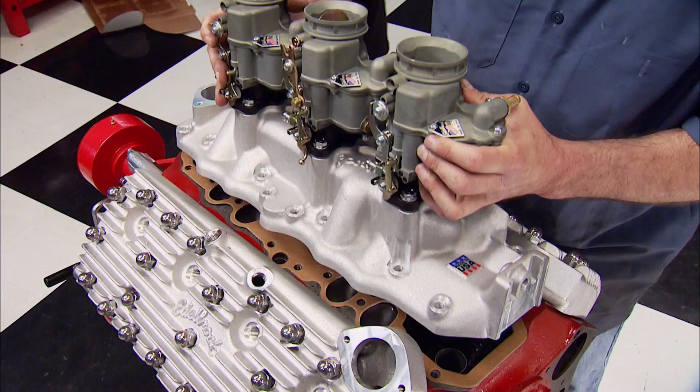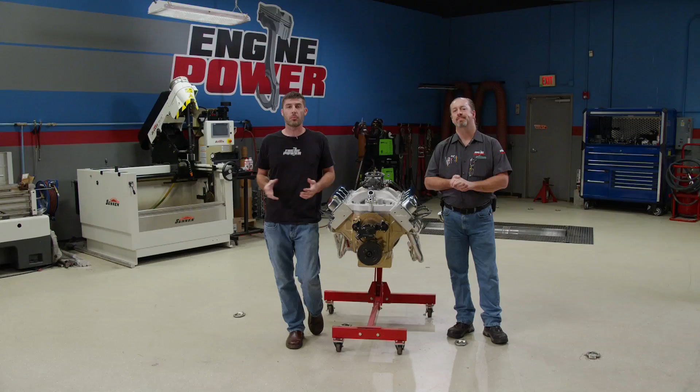Today, it's high performance history as we revisit some of our favorite iconic engine builds. Aside from building big performance power plants, we love to pay tribute to the engines that not only have personality, but plenty of history as well. And what better way than to revisit some of the vintage iron that we have had the pleasure to revive and give new life, and some more power.

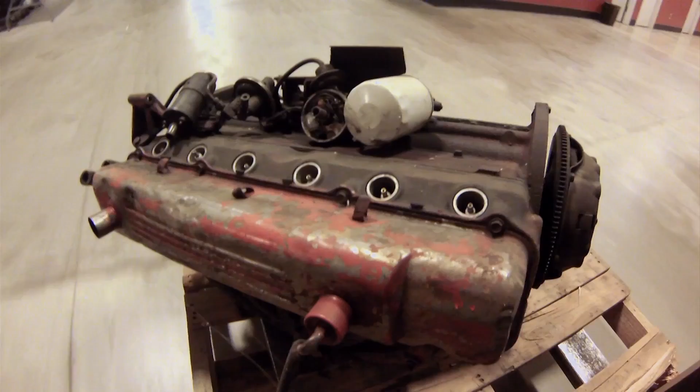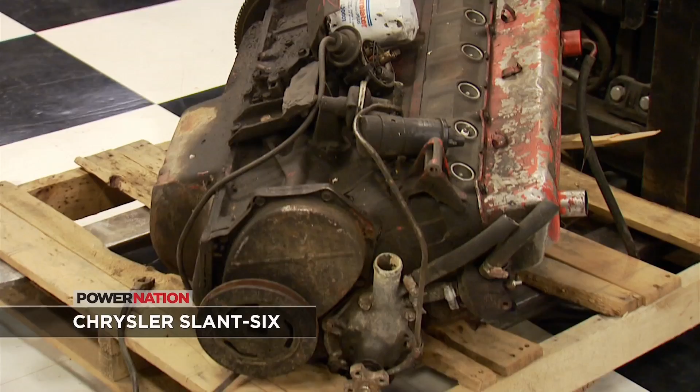Legendary for being indestructible, today we're going to dissect, rebuild, and hop up a true American cult engine, the bulletproof Chrysler Slant-Six. Why, you may ask? Well, it's a popular engine several of you viewers have been asking us to go through. Its revolutionary inline-six design is tilted 30 degrees off-center to allow a lower hood profile, a lower center of gravity, and more access to engine accessories.

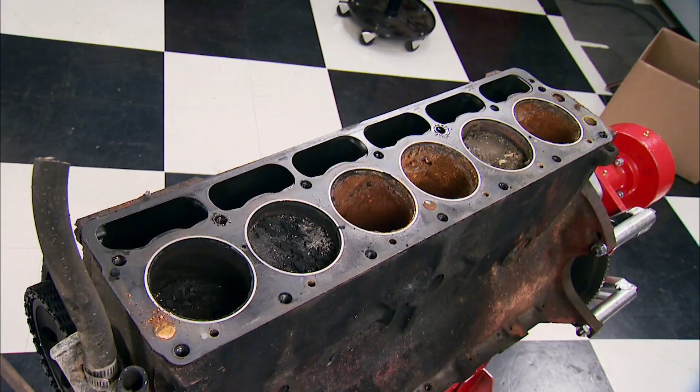We picked this one up at the local boneyard for $150, and while it's not going to perform like a V8, this leaning tower of power is high in the cool department. But I think it has some issues. Unfortunately, ours sat out in the elements and heavy corrosion kept us from reusing it.

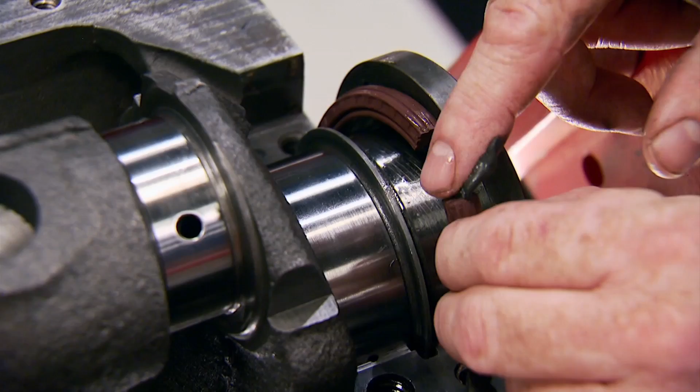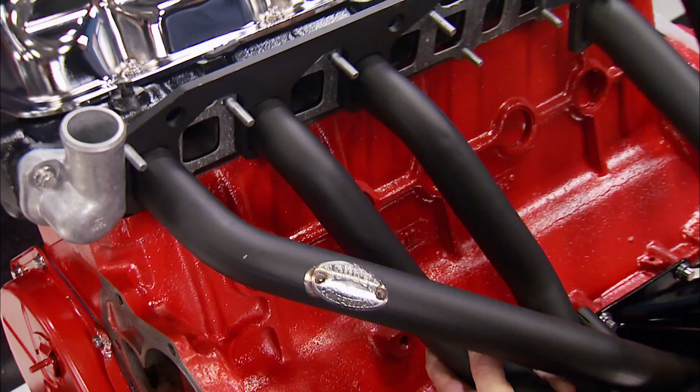So we started with a later model block and had it freshly machined. Now the crank was installed with an upgraded two-piece rear main seal, and reconditioned rods were dropped through the bores with new pistons attached. A completely refreshed cylinder head was dropped on the deck, and the engine was finished off with performance parts from Hooker, Offenhauser, and Edelbrock.

We couldn't dyno our Slant-Six because the bell housing diameter is too small and it wouldn't dock up to the dyno, but we told you we had a home for it, and it doesn't get any better than this 71 Duster. When it's cold, it spits, it sputters, I gotta warm it up, it's got an exhaust leak, so it just makes a lot of racket.

And here's its owner, Ken Symington, who has an emotional attachment to this work in progress. You know, this car is over 40 years old. There's not that many of them out there running, mainly since my wife bought it brand new. When I first met her, she was blonde, she was cute. Then the next time I saw her, she showed up in this red car, and the red car and the blonde hair went together, and I knew right then I was in trouble. She loved it. It was her first car. She might love it more than she does me. I've never asked that question to her.

This is actually more fun than dynoing a big power car. I feel safer, but not really. Just for fun, let's see what this one has left in it. All right, here we go. We'll make the pull from 2,000 to 3,800 and hope we can make it there.

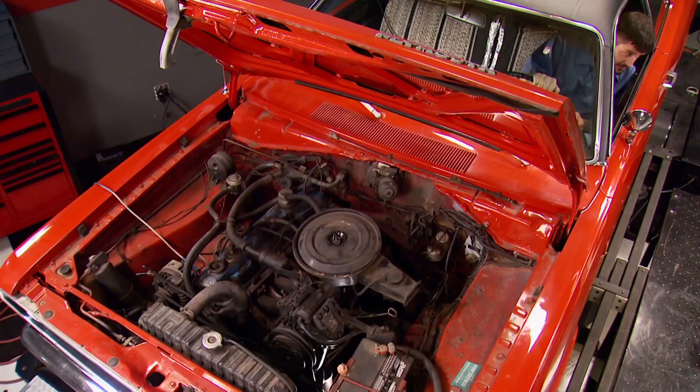This isn't the original 225 engine. It was replaced with a 95 horsepower 1975 model in the 80s, and it's seen a lot of miles since, making this Duster a perfect home for our leaning tower of power.

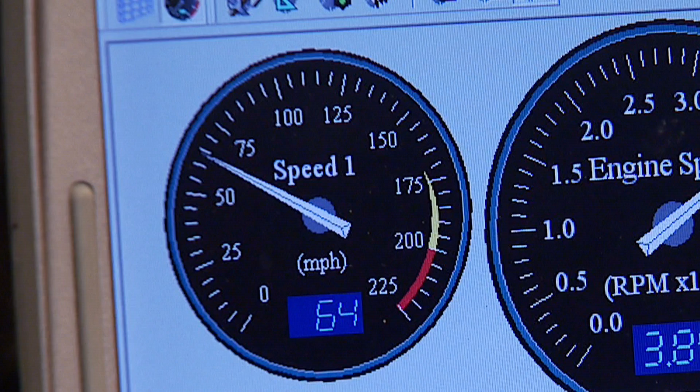I think we're there. At a whopping 64 miles per hour, it made just over 70 horsepower. And the graph tells the story. We're not laughing at it, because this was a staple of economical performance back in the day.

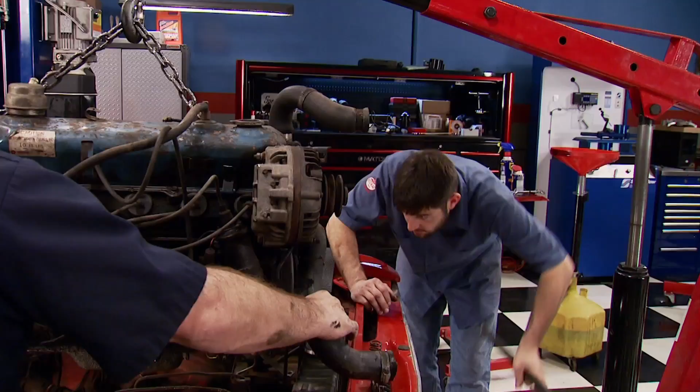You're good on the back. We can hoist this 225 out of the car to make way for the new Bullet.

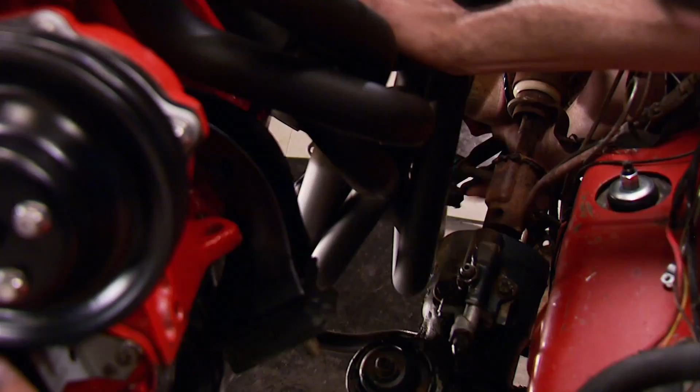It's time to drop it in. Hot dog. Nice, nice. I'm good right here. Coming down. Look, how's that other side? Oh, something happened. It's in. Yes, yes, yes.

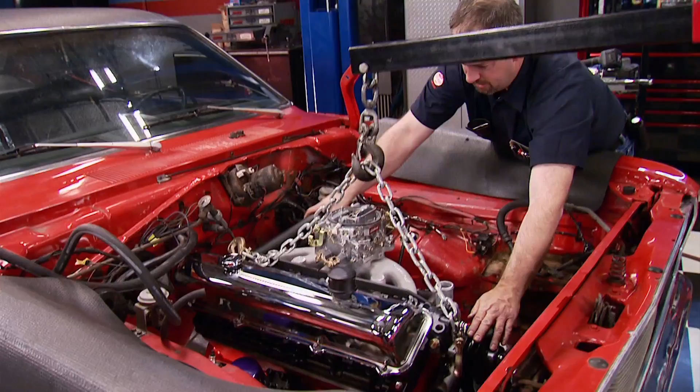At this point, this project is done, and just in time. That's super cool. I feel like a kid. I feel like a kid at Christmas.

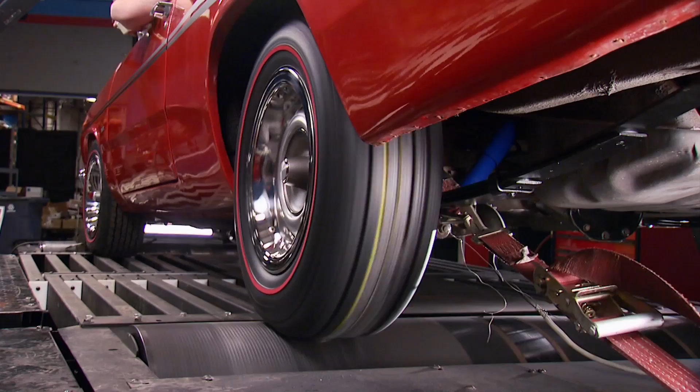We're taking this one to a safe 4,500 RPM. Look at that, 125 horsepower. Get out of here. 161 foot-pounds of torque.

Wow. We're not done. Oh, we're not? No, we're gonna pull a little more out of it. Oh, really? Yeah. Wow. Let's make a timing change, 2 more degrees of initial timing for a total of 6.

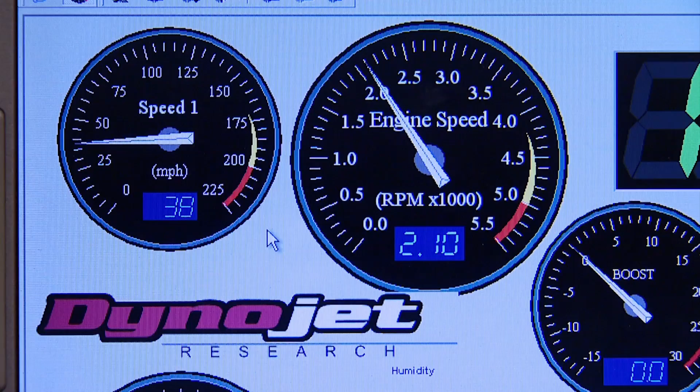129 and 164. Picked up 3 foot-pounds and 4 horsepower. That's impressive.

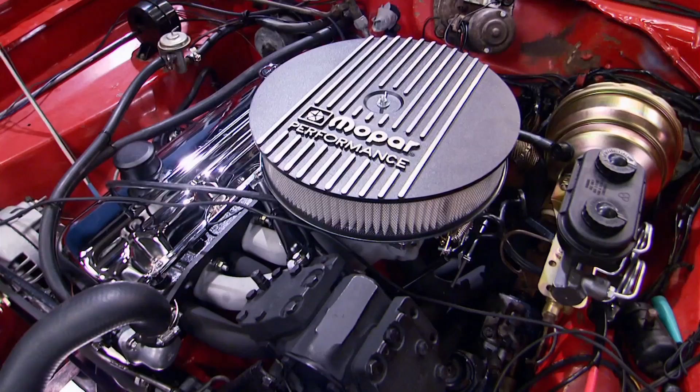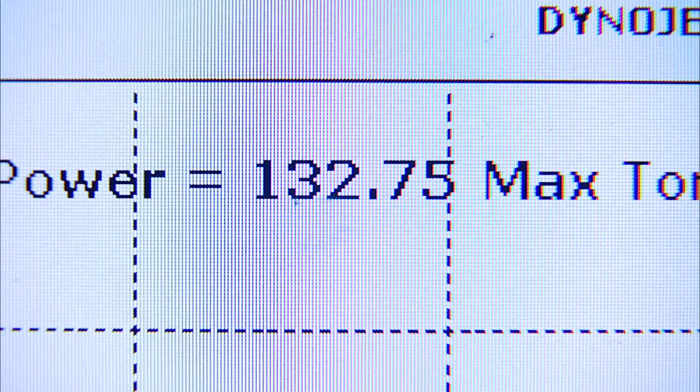One last run with 2 more initial degrees for a total of 8. How you like that? 132, 170. That is marvelous. 2 degrees picked it up 3 horsepower and 6 foot-pounds.

And you just can't get used to hearing that roar. I see it rolling down the road, just zipping. And now he can, with almost twice the power he started with. Hats off to Ken for keeping the legend of the Slant-Six alive.

Now, let's hop in the way back machine for an engine that started it all, the Ford Flathead.

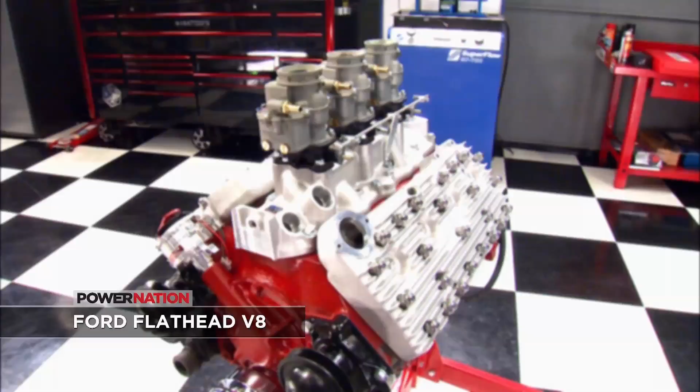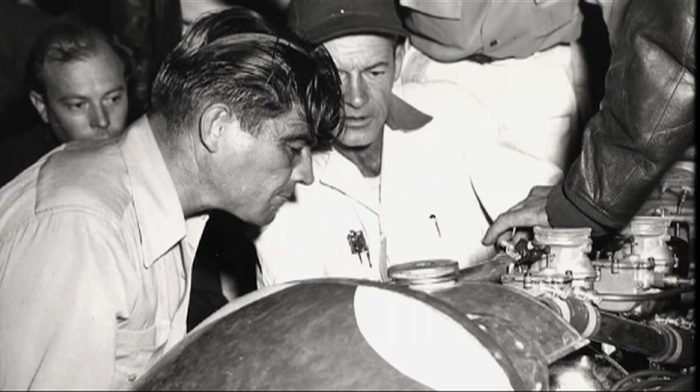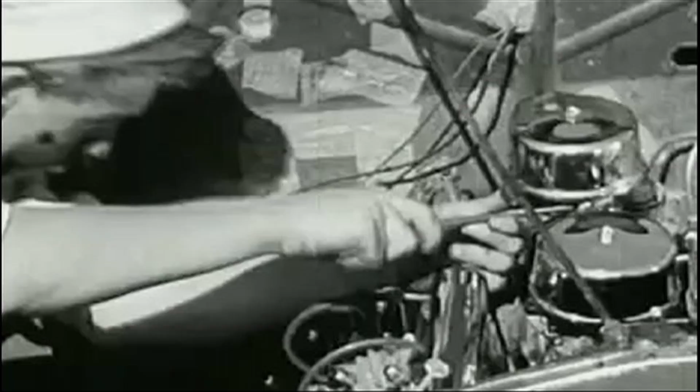A while back, we took a closer look at the engine that launched an entire lifestyle and industry based on power and speed, the Ford Flathead. A simplistic V8 with room for improvement, and it didn't take long to find it. It was then when Edelbrock marketed his first high-performance intake manifold, with a cylinder head soon to follow. And he wasn't alone. Go-fast parts were popping up everywhere. A new purpose for the Flatty was well on its way.

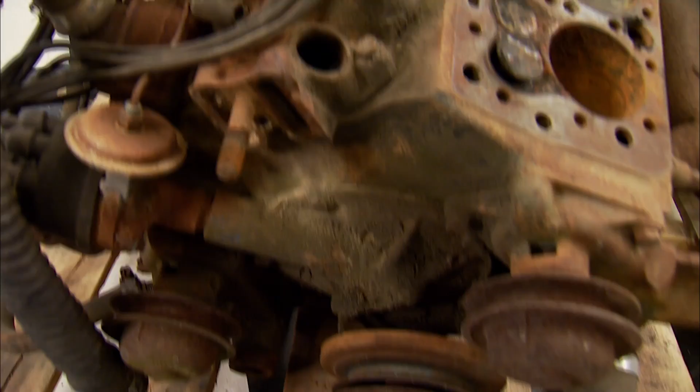We found ours in a junkyard intact. The casting tells it's from the mid-50s, and the rust confirms it. This thing is locked up solid. A short soak freed up some pistons, but the rest put up a battle. The block had been previously bored and appeared solid, but only a trip to a machine shop can confirm it.

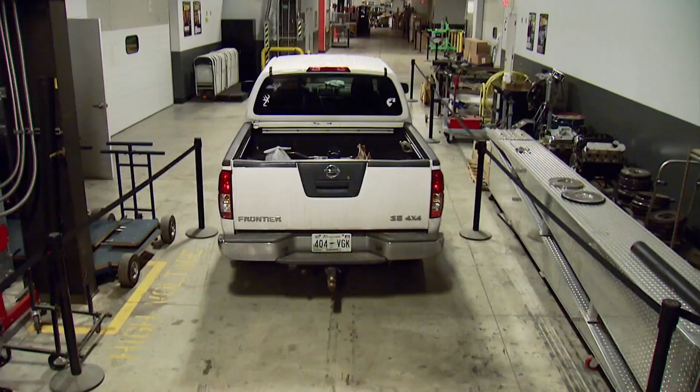Up next, back from the machine shop, we're building power.

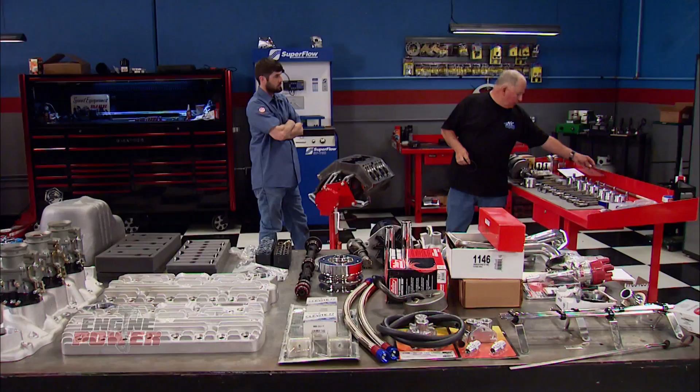We're back, and so is the Flathead, along with legendary engine builder Keith Dorton. He also brought his passion.

You know, they're the coolest sounding engines you've ever heard. They have a unique sound, and they run so smooth, and in stock form, they were just as quiet as a Cadillac engine, you know.

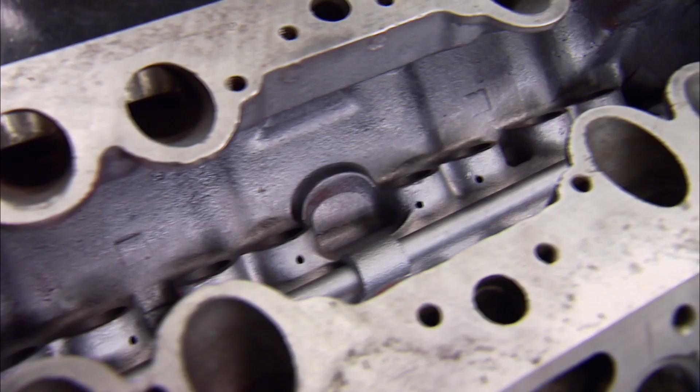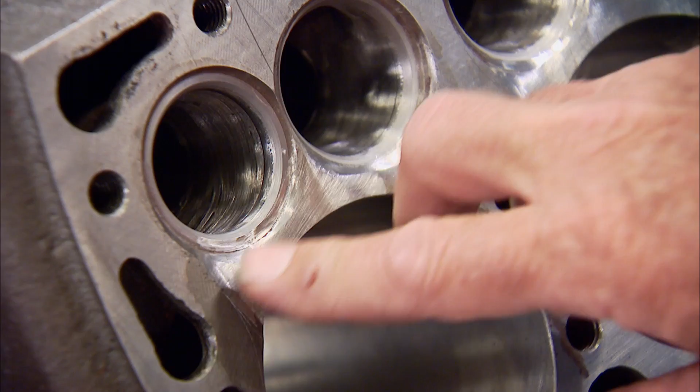So it was good to find a block that was in as good a condition as this one is, even though it had some cracks in it that are common with the Flatheads, but this one, about as good as you're gonna find now. All that we had to do at the shop, and it wasn't a must, was we did the relieving of the block, which is the area between the valves and the cylinder. We dropped it about 80 to 90 thousandths to increase the airflow from the valves to the cylinder, which is part of the combustion chamber.

The first part of the build will be the bottom end. Now a set of Clevite bearings will fill the Flathead's 3 main journals. The crankshaft is Scat's 9000 series, made for the street and strip. It will give our Flathead 304 cubic inches.

Next up are the original main caps, now filled with the other halves of the Clevite bearings. ARP bolts will anchor them in. With ARP's ultra torque on the bolts, we can torque the first 2 caps to 40 foot-pounds.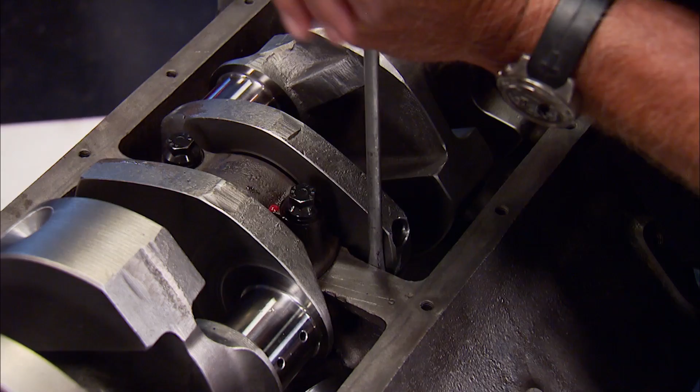Forcing the crank towards the front of the engine will align the 2 halves of the thrust bearing, which is at the rear. Now torque that cap to 40 foot-pounds. Set up the magnetic base and dial gauge on the crank snout, and with the reading at 0, we'll rock the crank from front to back to check the thrust clearance. Right at 6, which is in spec.

Now torque all the caps to the final value of 70 foot-pounds. The Scat rod is held to the Ross forged piston with a floating pin. Spiral locks will keep it in place.

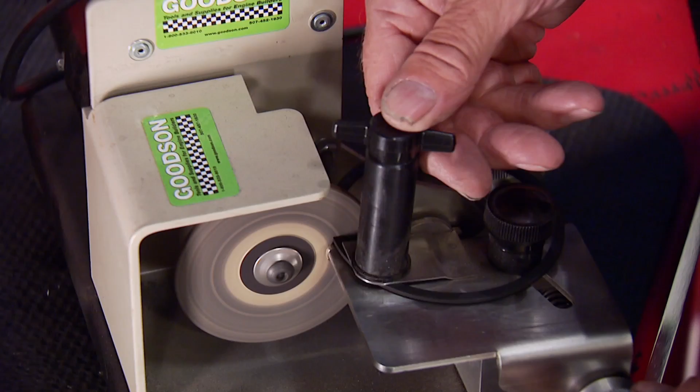Gapping the rings is a must. Keith is using our Goodson filer to open the gaps, which will prevent them from touching when the engine gets up to temperature, which would lead to a major failure.

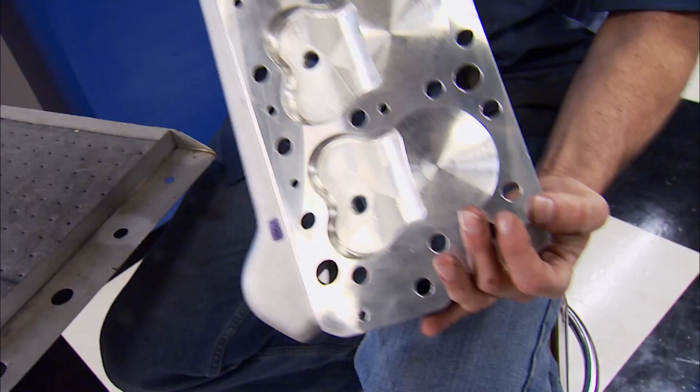Vic Edelbrock Sr. designed the first aluminum performance flathead cylinder head back in 1938, and from that point on, production never ended. This is the 49 through 53 version, and it got its name from the thin design. Underneath, the combustion chamber looks small, but it's actually 65 cc's. They're ribbed internally and externally for strength and have large water jackets for better cooling. Both heads will be torqued in sequence to 60 foot-pounds.

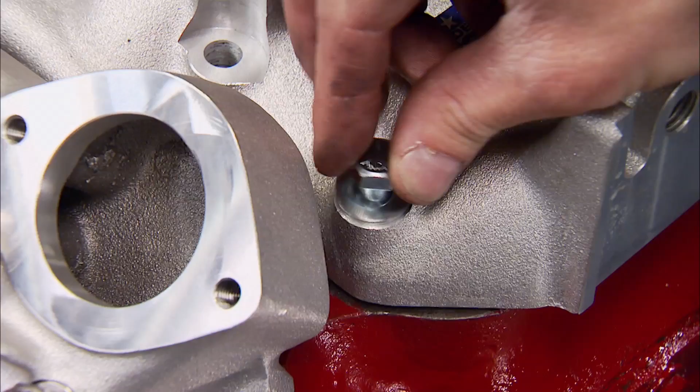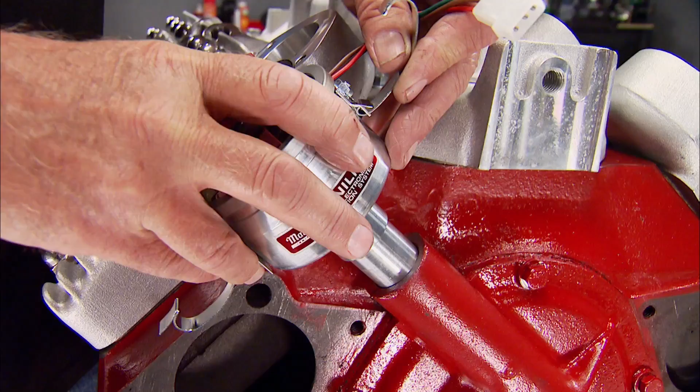For spark, a Mallory Unilite electronic distributor, a huge leap in technology from the 50s. New high-flow water pumps are next, and these will be the last parts Keith installs for us.

We got to put some fuel lines on it, or you do, because I got to get back to work. We've been gone long enough.

Keith did what he came to do, reviving an important piece of history. Really a fun project to come back and work on something this old. And I'm very confident that we're going to get some good results out of it. And if Keith says so, so it shall be. Now, as far as a horsepower goal, we're going to let the dyno decide, because we just don't know.

Got your seatbelt on and your helmet strap? I'm ready. Good. Let her rip, Tater Chip.

156, 247. Awesome. I like it.

Let's throw some timing at it and see how it likes it. We'll sneak it up to about 26.

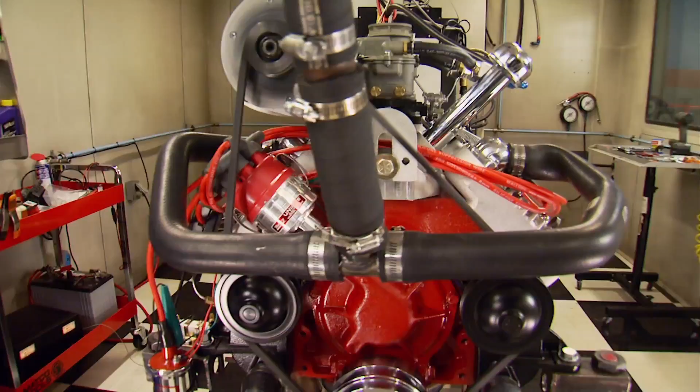So it's back to 26 degrees for one last pull. We'll claim victory at 159 horsepower and 257 foot-pounds of torque.

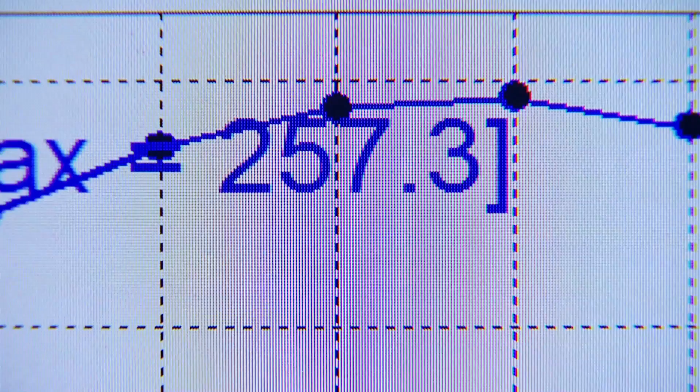I'm glad I got to be able to help with it. This is ultra cool. It's a great little engine. It looks great. We've built plenty of engines, but the Ford Flathead was a boneyard to beast favorite.

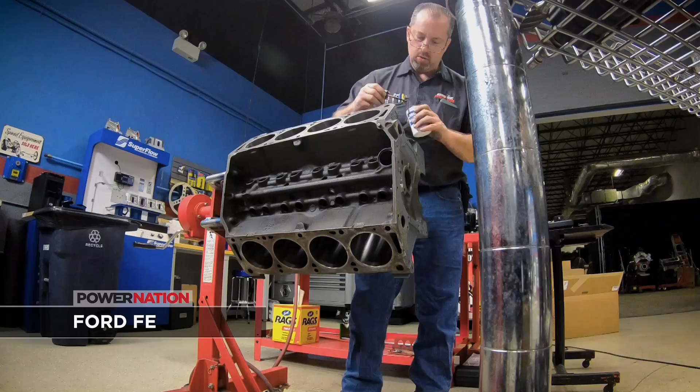We're back on engine power with a new and, more importantly, damage-free block for the 390 FE build. Before we got started, we examined this block inside and out, and it looks good.

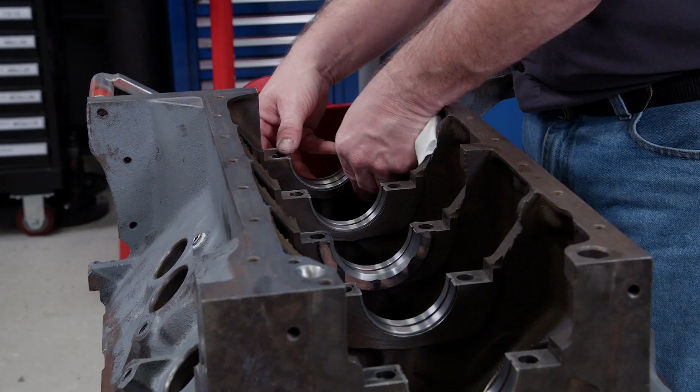Now we can make forward progress on the build, starting with new cam bearings. Next are a set of Speed Pro main bearings, with the clearance set up between 30 and 33 ten-thousandths. With a fresh rear main seal in place, the bearings are lubed with Permatex Ultra Slick. Then the crankshaft is carefully placed into the block. This is a cast steel piece from Eagle Specialty Products with a 4.250 stroke. The ARP fasteners are torqued to 100 pound-feet.

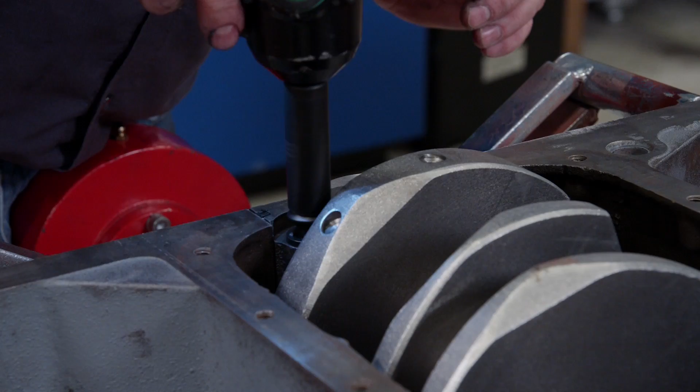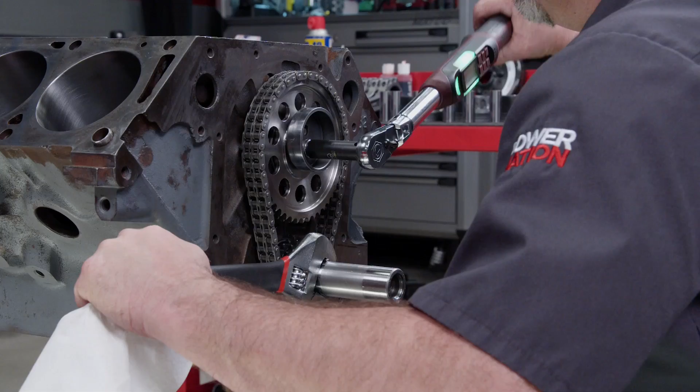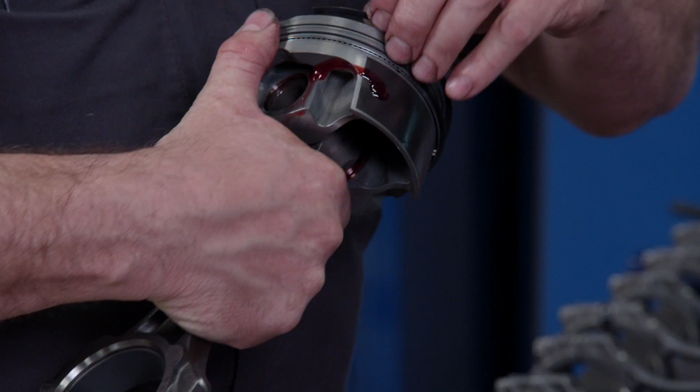The camshaft is a custom ground billet hydraulic roller from Comp Cams. The lobes are from their Extreme Marine High Lift series, which increases durability with extended run times. Comp also provided the billet double row timing set. The pistons are Mahle PowerPak series with a 16cc dish. They are mated to a set of Eagle 4340 forged I-beam connecting rods that are 6.700 in length. The included ring package is a modern 1mm, 1mm, 2mm thick set.

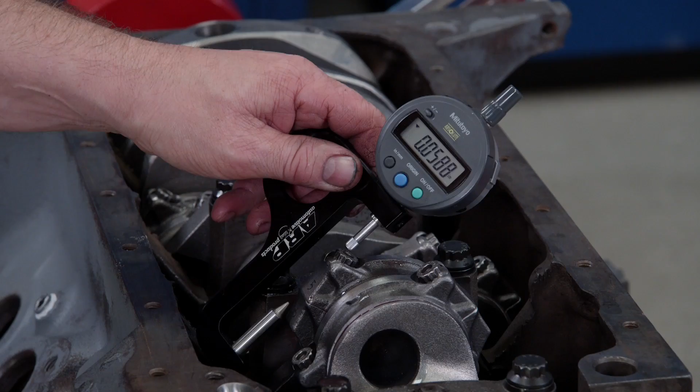The rod journal is the same size as a big block Chevy, and the rod bearing clearance is between 23 and 27 ten-thousandths. The rod bolts are torqued to 90 pound-feet to achieve the correct bolt stretch of 59 to 63 ten-thousandths. We confirm this with our ARP digital rod bolt stretch gauge.

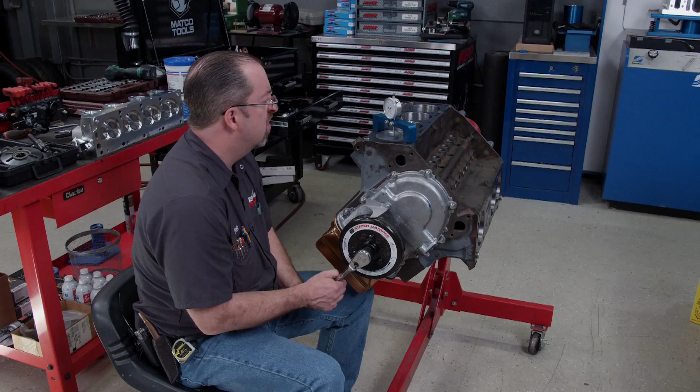A Melling high-volume oil pump will keep the engine well lubricated. We chose Milodon for the windage tray, oil pickup, and 8-quart oil pan. With the ATI balancer in place, true TDC is set, and the timing pointer is modified to indicate 0.

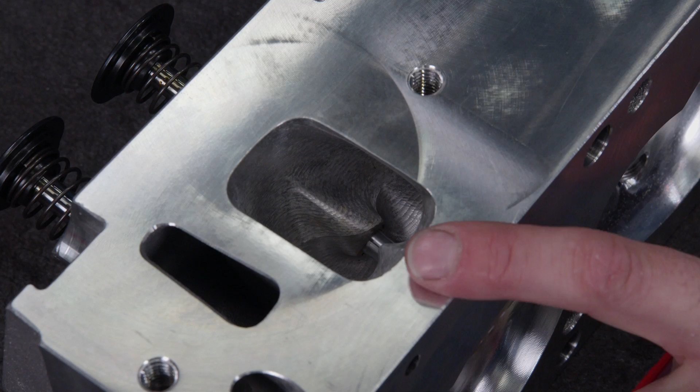It's time for this old iron to meet modern airflow and performance thanks to the guys at TrickFlow for designing and bringing to market these FE cylinder heads. They're designed for 390 through 428 engines and are dubbed the PowerPort 175s, named for the 175cc intake runner. The combustion chamber is heart-shaped and measures 70 cc's. The intake valve is 2.190 and the exhaust valve is 1.625 diameter. Flow at .600-inch lift is 332 CFM, and these heads are a direct bolt-on for all '61 through '76 FE engines.

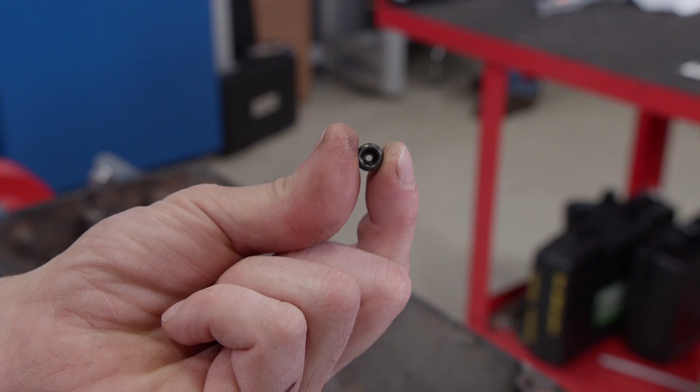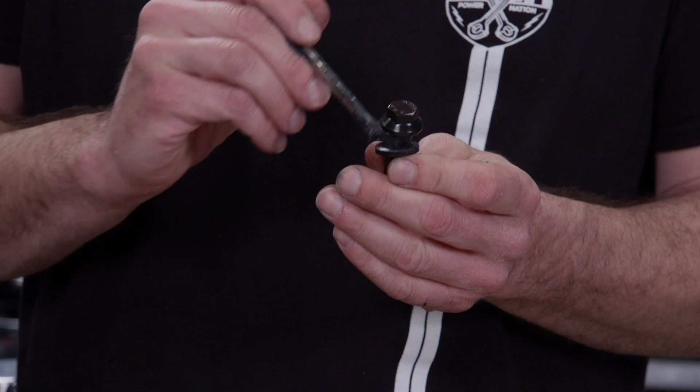We're restricting the oil to the top end of the engine using a 3/8 set screw with a 75 thousandths hole drilled into it. This ensures more oil goes to the main and rod bearings instead of flooding the valve train. 30 thousandths thick Cometic MLS gaskets drop into place, followed by the cylinder heads, which are torqued to 100 pound-feet.

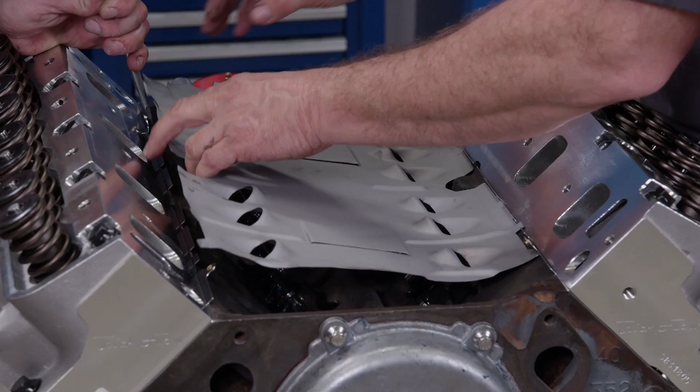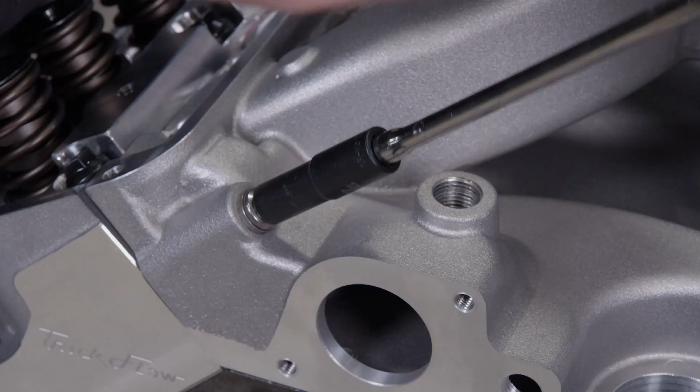Comp retrofit hydraulic roller lifters will move the valve train. Our freshly sandblasted intake splash guard goes in, followed by some beads of Permatex Right Stuff 90-minute gasket maker. The TrickFlow Track Heat intake manifold is a single plane design with a basic operating range from 4,000 to 7,000 RPM, perfect for our application.

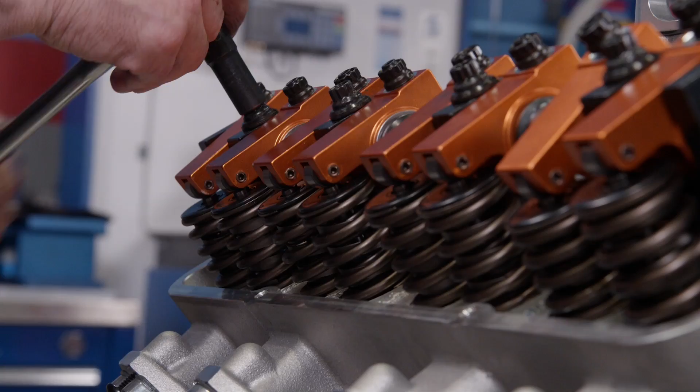Our engine combination requires custom length push rods, and Trend Performance made it happen with a set of 8.900 long, 80 thousandths wall, 3/8 diameter pieces. No matter what you need, they can handle it. The heavy-duty shaft rocker assembly is from Harland Sharp. It has a 1.76 ratio with a 7/8 inch shaft and full needle bearing construction for high horsepower and endurance builds. Valve lash is set, and this engine is headed to the dyno.

Okay, we've got the 445 cubic inch FE on the dyno. It's running and we're ready to make some pulls. This thing is gonna be a beast. How are you doing the pulls? We're gonna go 35 to 65 to start out, 34 degrees of timing.

Hello, sir. Look at that. Hello. How you feeling now? Wow. Woo! 550 pound-feet of torque and 562 on the first pull. I got all tingly on that one.

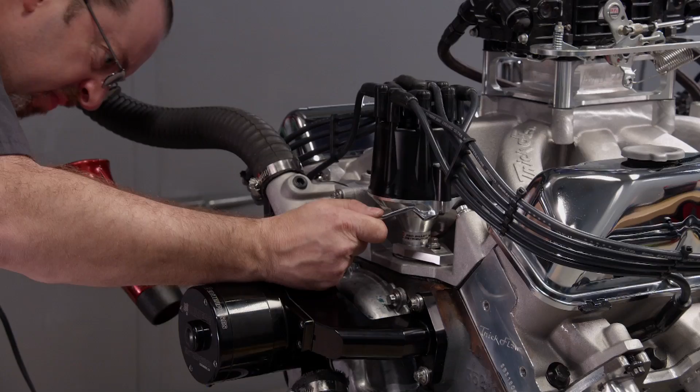Man, now we got to step on some timing. We'll add 2 more degrees of ignition timing for a total of 36 degrees. Give her the gusto. Pretty healthy FE. Absolutely.

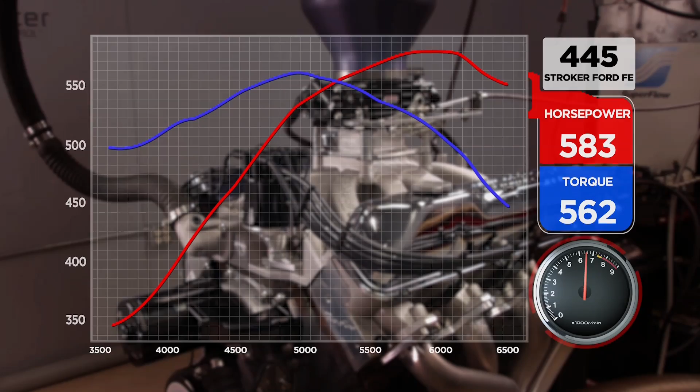Nice, super clean through the pull. Liked it. 583, 562. All right, we're starting to get into a threshold there. I'm completely fine with stopping here. This is a stump pulling, heavy car, heavy truck, anything. I would like to see this go in a truck. Yeah, me too. Beautiful. Nice hustle.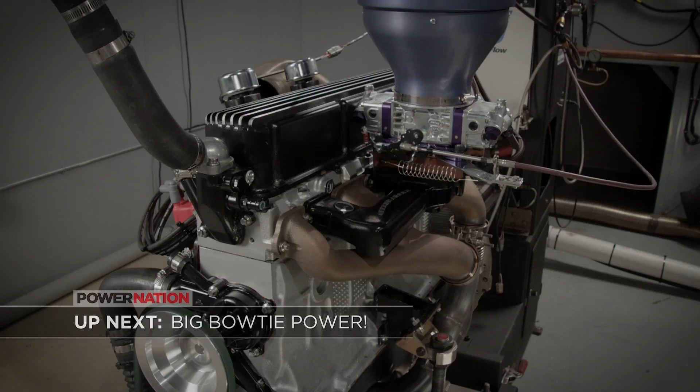Up next, it's an interesting request for some big bow tie power.

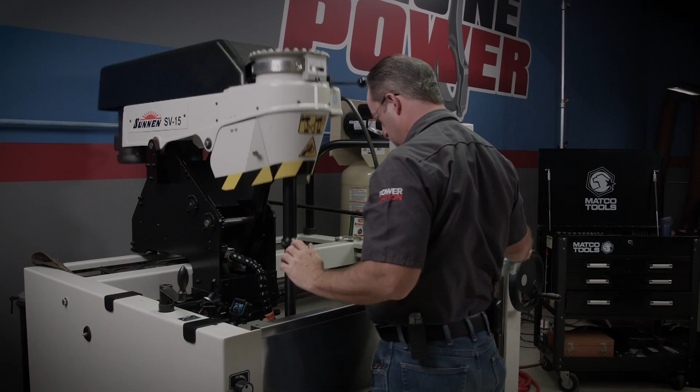It's time for us to start some new projects, and you may be wondering what we're doing over here in the Truck Tech shop. Well, we're teaming up with LT and Austin on their '65 Chevy truck project, and like usual, our assignment is in the engine department. This is the actual engine that we're building for Truck Tech. We honed it here on our Sunnen SV15, did some headwork on our MSC industrial machinery, then took it to Shacklett Auto Machine to do a valve job. It was assembled using parts from Summit Racing, Trend Performance, 12bolt.com, and Comp Cams.

We had some fun with LT and Austin on the dyno. Here's how that went down.

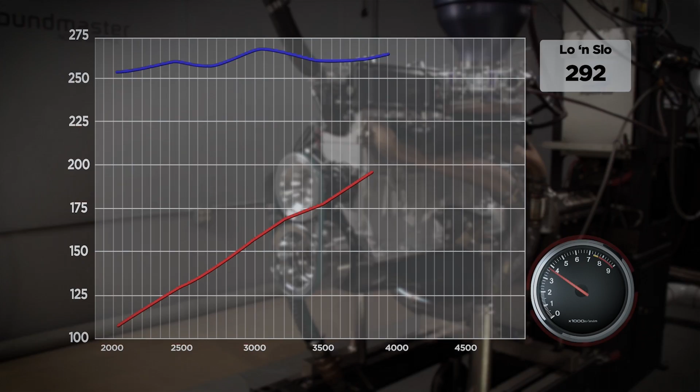Yeah, that's where it starts to sound good. Sounds like an airplane. Awesome oil pressure, everything. Let's see what we got.

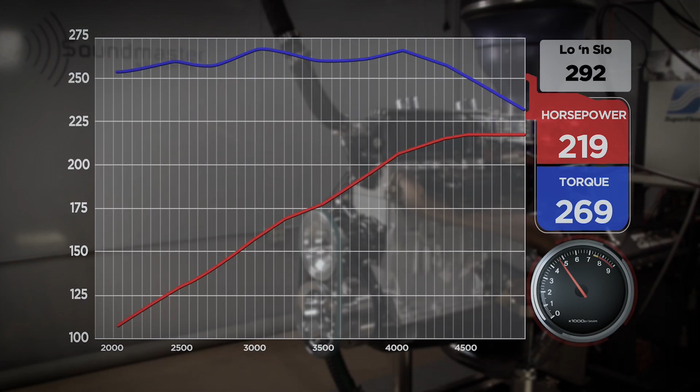You guys will hate me for saying this, but it almost sounds like a Skyline motor. You shut your trap. Wow. So these came from the factory with like what, 165, right? I think, yeah, somewhere in there. 160, 165 is what we looked up.

From small 4-bangers to big-inch race engines, turbocharging is an easy way to make efficient and very impressive horsepower.

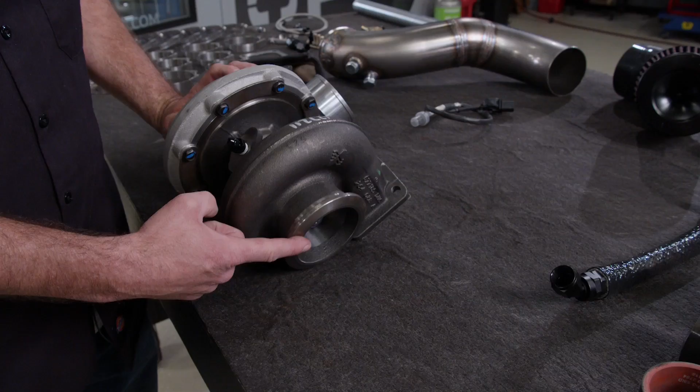Our task today is to outfit that 292 with this turbo system that LT and Austin designed for their project. It has a cast iron turbine housing with a 3-inch V-band outlet, and the turbo has a .88 AR ratio. The rest of the system was designed to be simple and straightforward, eliminating the need to constantly work on it to keep it on the road. It's a driver, not a race rod.

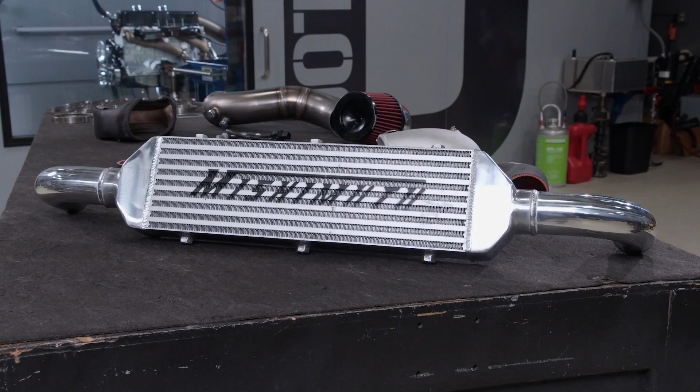With that being said, other components include an air-to-air intercooler, precision wastegate, Turbo Smart blow-off valve, and several clamps, pipes, and components to wrap up the plumbing.

One of the main changes happening from the naturally aspirated to the turbo setup is that the carburetor will be going away. We've opted to run one of these new EFI setups that Holley has been developing.

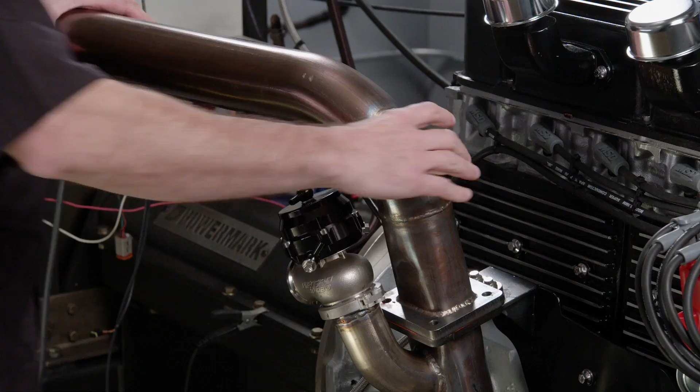LT did a great job fabricating the hot side for both the NA runs and the turbo install. Nice going.

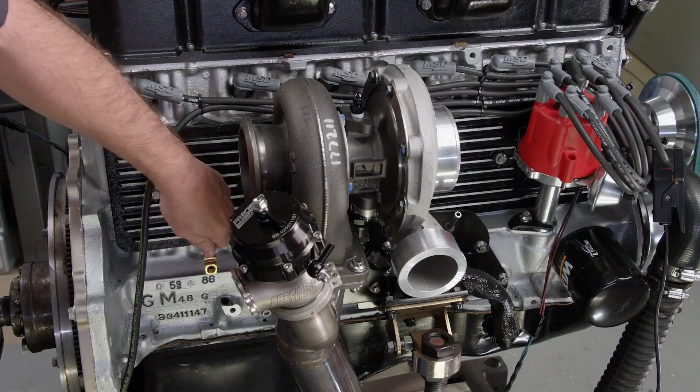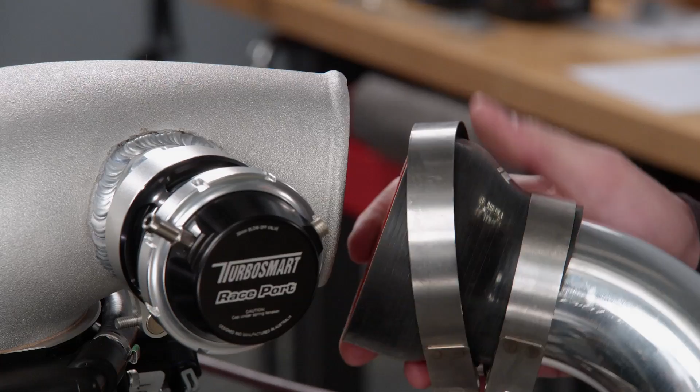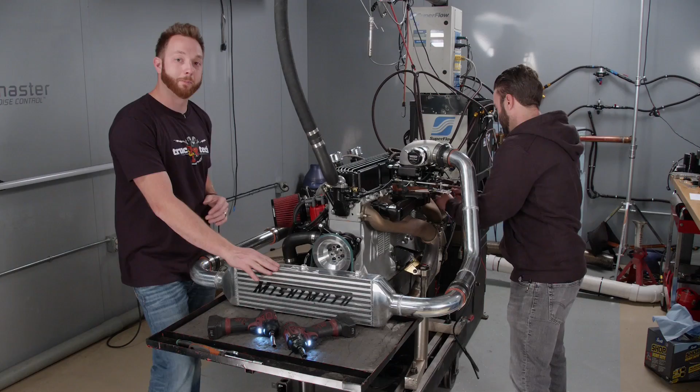It's always a great idea to have an intercooler anytime you're pressurizing air with a turbo because that heats the air up and we want to cool it back down so it has the most capacity to make more power. Colder air is denser.

Now, you might look at this and think, well, it's not a very large intercooler, and you'd be correct. But there's two reasons that work in our favor. Number one, we're not going to be pushing this turbo very hard, so it's not going to be generating a ton of heat. And the second reason is just space. We don't have a ton of room behind the grill and in front of the radiator on our C10 that this 292 is going in, so that's just a fact of life. This is what we have to work with.

We also installed the Turbosmart Race Port blow-off valve, which on a gas motor, when you let off the accelerator, that throttle plate is going to close, and it just relieves that extra boost. That way you're not stalling out that turbo.

Austin and LT just wrapped up installing the cold side on their 292, and it looks pretty impressive. Now it's our turn to go ahead and put in all of our new notes for the turbo system and get the dyno all up and running so we can make some pulls. And before we do that, Pat's got something to tell you about in the dyno room.

Having the Sniper X-Flow EFI run on a naturally aspirated versus a turbo is simply telling it what it's on. If you go into the initial setup wizard, you can actually choose turbocharger, nitrous oxide, supercharger, or naturally aspirated, and that tells the unit what it's on. That will give you a couple of options of retarding your timing per boost level and also adjusting your air-fuel ratios for boost level. It's pretty slick.

All right, LT and Austin are wrapped up and it looks really good. Now it's our turn to make some noise, as LT would say. They had to run out and go do something else, so we're going to continue with the dyno pulls. Right now we have the natural and the red spring in the wastegate for a total of 7.5 PSI of boost. Pat's going to go ahead and make the pull and see how this thing ends up.

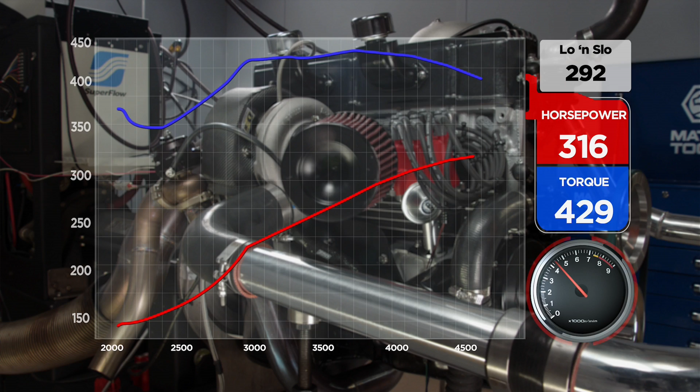Hit the red button. Man, look at that. That's not bad. What do we want to do with spring? We go with the natural and the green spring. That'll go from 7.5 to 10.5, a 3-pound increase. I'll buy that. All right.

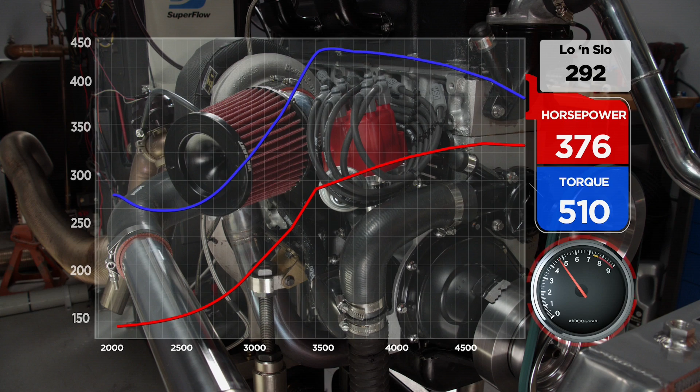Wow! Holy cow! 510. Now I kind of ramped it in there. 376 horsepower. I'm definitely happy. Man, this is a win. This is absolutely a win.

Good job. I love history and I love engines, so hopefully this will inspire you to rethink your next project build.